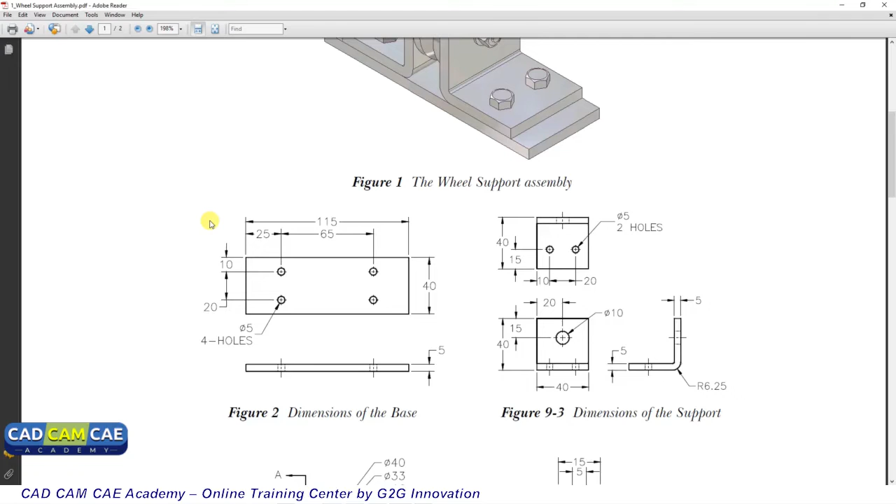Okay, so it is always recommended to make hand sketches and then you can use the software. It is very easy to use software once you understand the drawing and you are able to imagine the part. Okay, so let's begin with this part, that is the base.

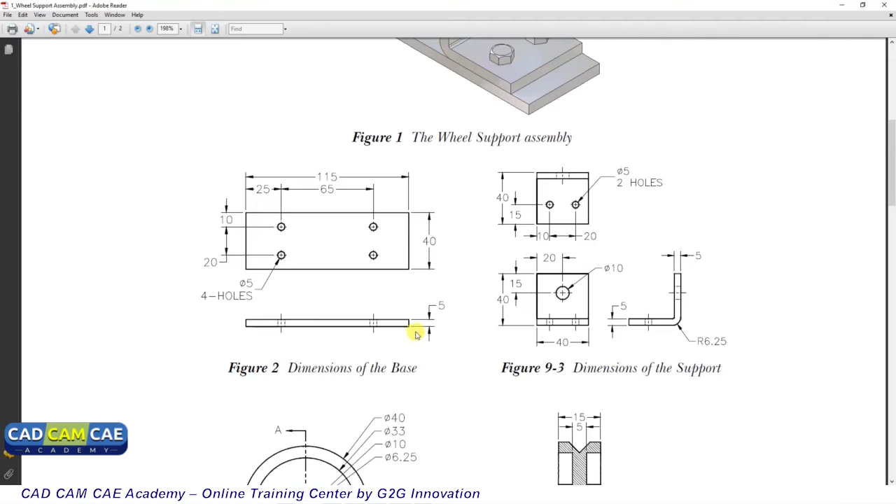Let's open CATIA, click on start, go to mechanical design, part design, select a plane. We will select here YZ plane, click on sketch, and then we have a base plate, thickness is 5 mm. So we will make a rectangle of 115 mm by 5 mm.

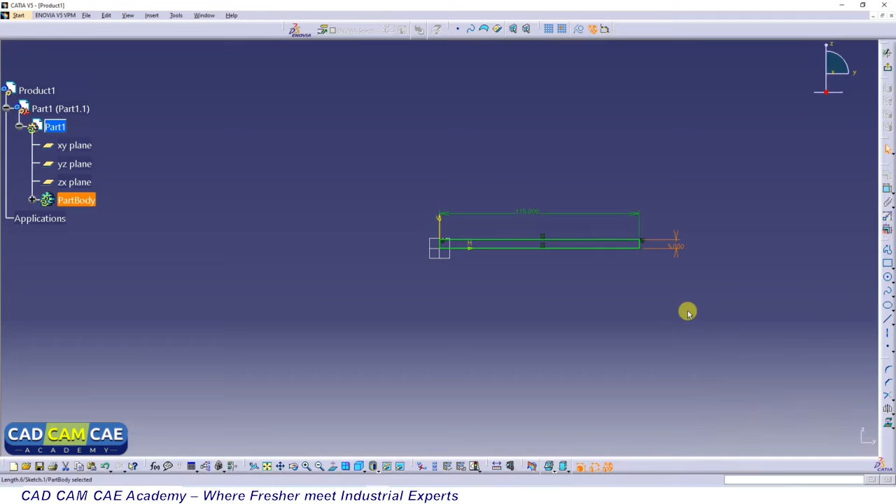So let's select the rectangle, give the dimension 115 mm, and here we have 5 mm. Okay, let's come out of the workbench, click on pad, and we will reverse the direction, and we want it to be 40 mm. Okay, so 40 mm, preview, click OK.

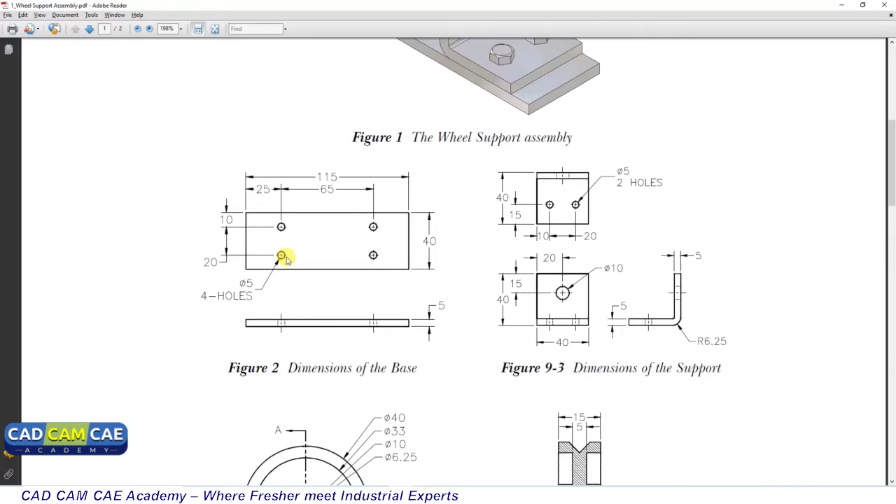So we have a base plate here and we have to put these holes here now. So we can do it by two options. Either we can use the hole feature here, or we can create a circle on the surface and we can create a hole. So we will go by selecting this face, click on sketch, and we will create a circle.

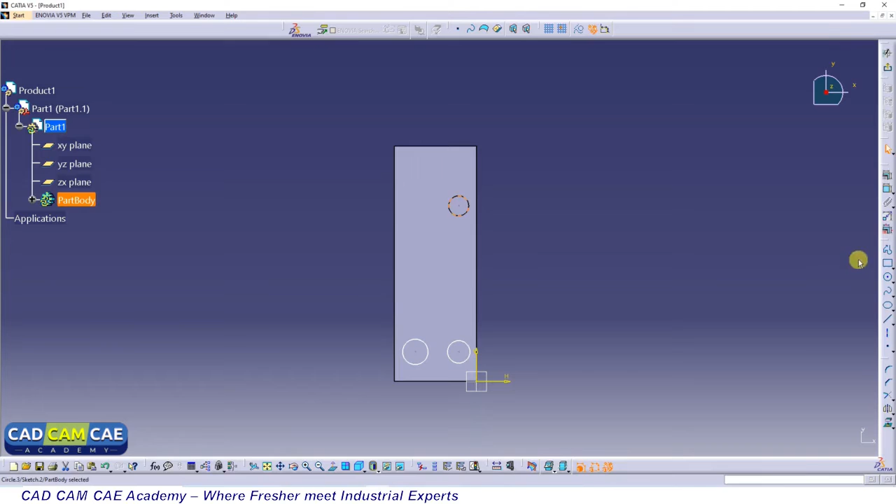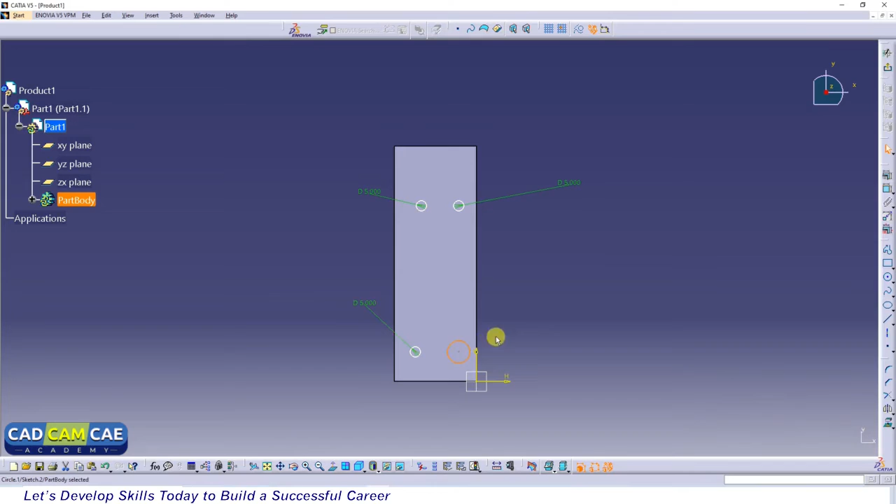Four circles. Let's give dimension to it, and we want it to be 5 mm in diameter. Let's make it 5 mm. Now let's give position to it. So we have each hole 10 mm from this horizontal edge and 25 mm from the vertical edge.

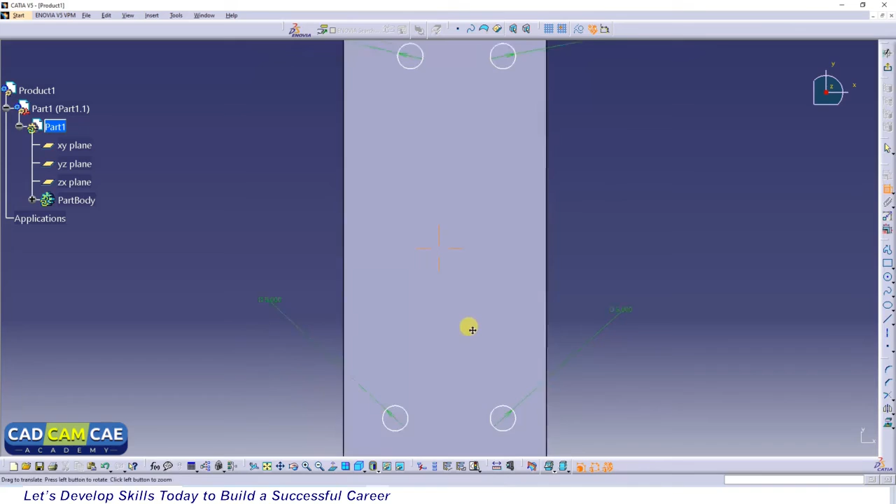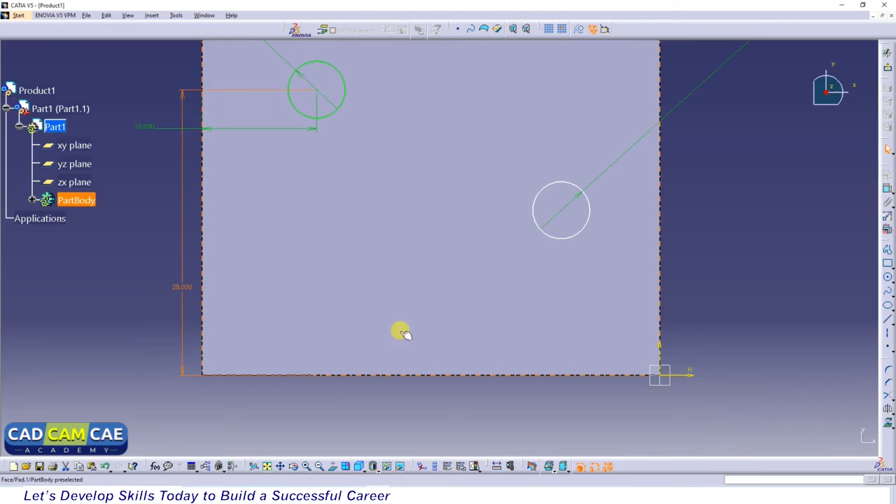So let's give the dimension. Click on this edge and click on this. Let's make it 10 mm. Similarly, from here to this edge it is 25 mm. So let's make it 25 mm. Let's repeat the same thing to all the circles.

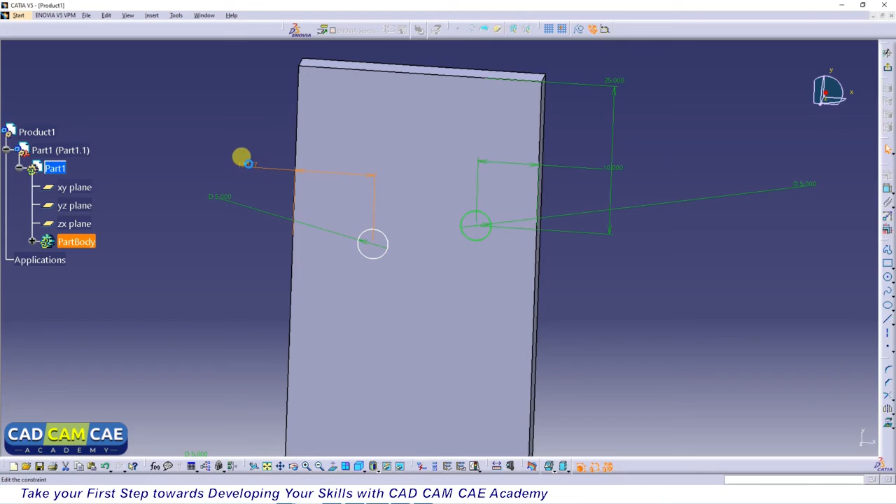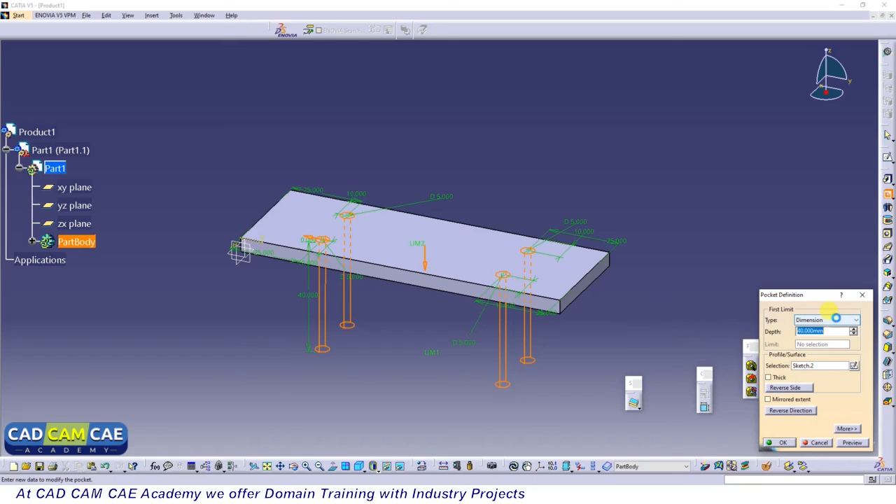Let's exit the workbench and click on pocket, up to next, preview. Okay, so we have a base plate here and this is what we have created. Okay, let's save it, Control S. Let's rename it as base. Okay, save.